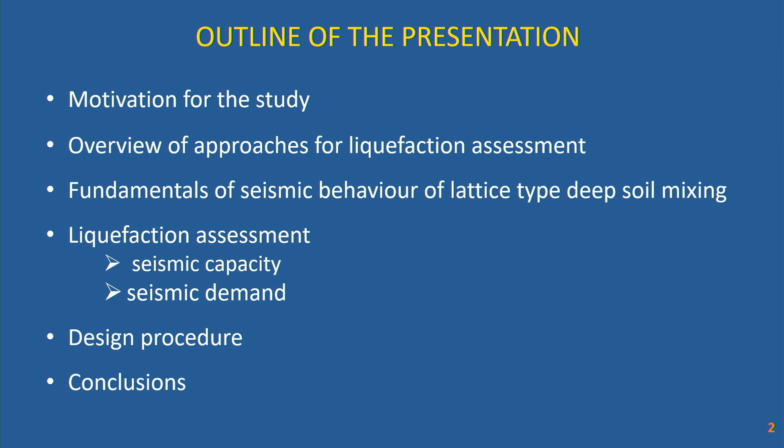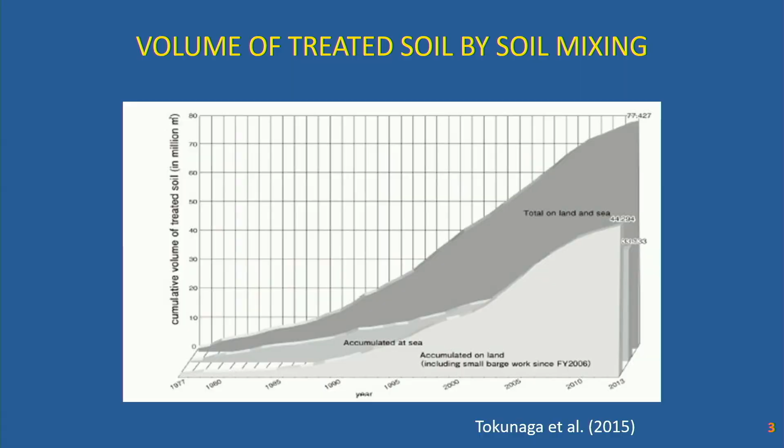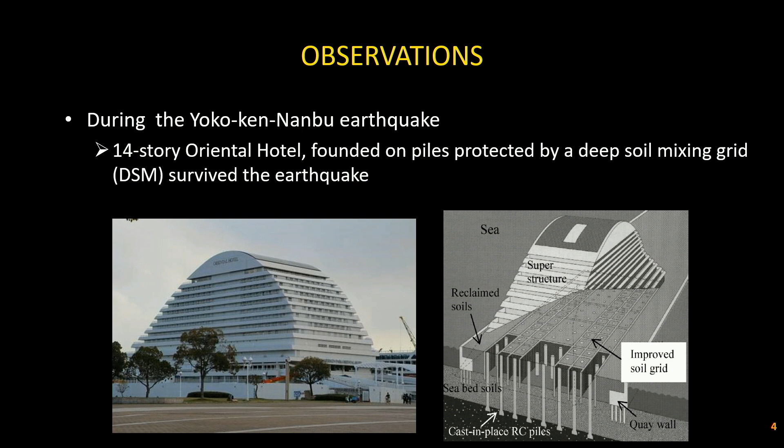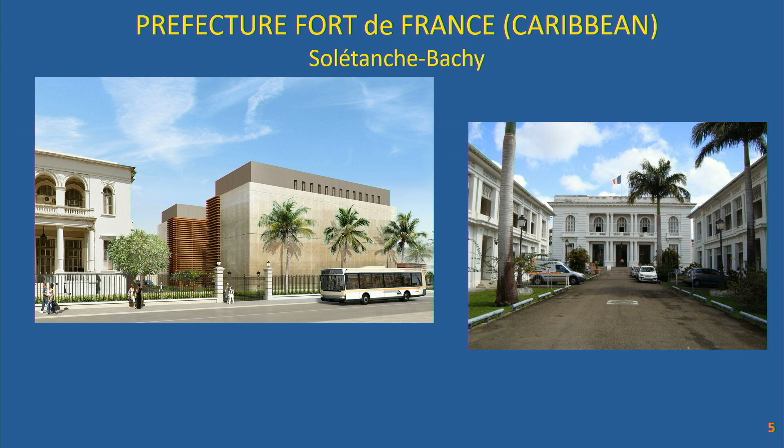The second example, for those of you who were here in 2018, I presented this project already, but at that time we had just completed it. It's a building in the Caribbean, in Fort-de-France, Martinique, and the contractor was Soletanche-Bachy. The problem there was that the building is constructed on a reclaimed hydraulic fill, more than 10 meters thick, on top of a sloping rock surface.

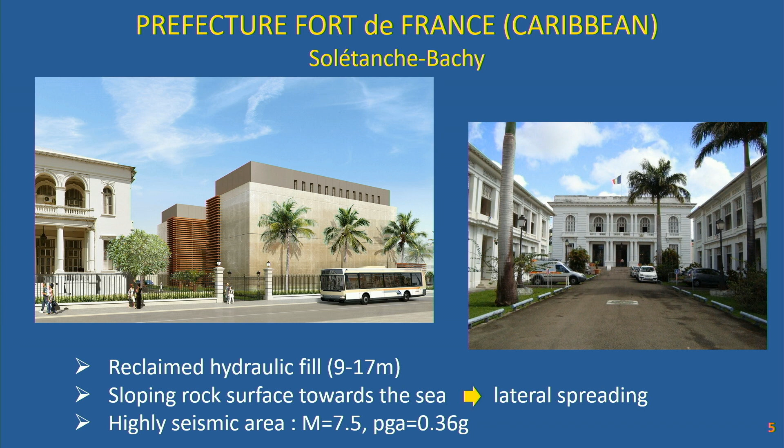Due to the highly seismic area, characterized by magnitude 7.5 and a PGA of 0.36 G, lateral spreading was a real issue. So what was done at that time, inspired by the Kobe Oriental Hotel, was to found the building on this grid of trenches made with deep soil mixing. You can see here, this is the site, and you can see the grid here.

The justification of this foundation was quite easy because we did not care about liquefaction within the cell. The building was designed to rest only on the trenches, and the only issue was to protect against lateral spreading.

So justification was quite easy. But of course, the contractor, Soletanche-Bachy, wanted to go further in the future, and they needed more precise guidelines, even to account for the pore pressure buildup within the cell, trying to have a building with a raft that might be thinner, and so on. That motivated a research project sponsored in France by the National Federation of Public Works and by Soletanche-Bachy. These are the results of this project that I will show now.

So first of all, we have to go back to the fundamentals of liquefaction assessment. When I say we have to go back to the fundamentals, it's because usually people assess liquefaction based on the stresses induced in the ground.

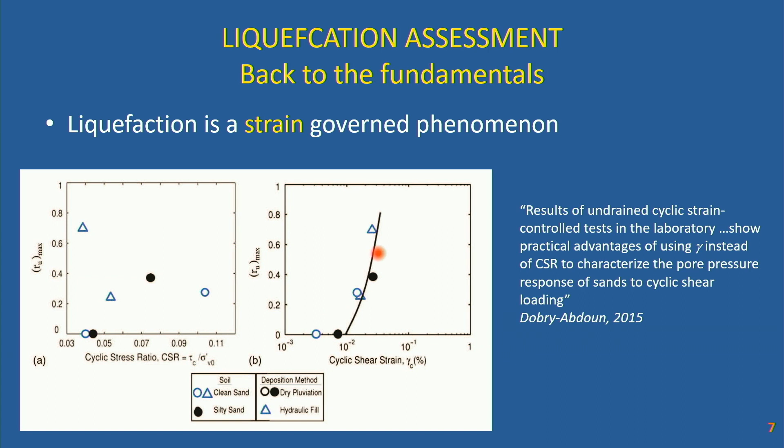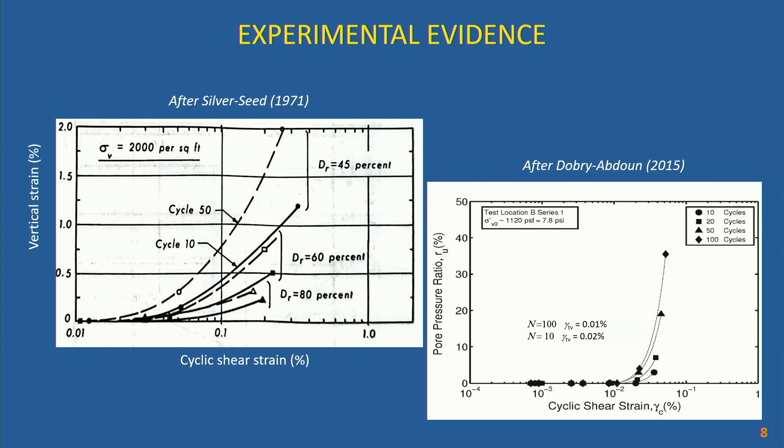And this is again the same plot in terms of pore water pressure taken from Dobry and Abdoun. So, evaluation of soil liquefaction: what we are doing right now, and when I say right now, it will even be the same in the new version of Eurocode 8, which will come out in a few years because it goes to the formal vote next year.

It's a stress-based approach, like the one which is well known now, described in the NCEER report, or the one used by Idriss and Boulanger, which will be recommended in the new version of Eurocode 8. So it's a stress-based approach in which you have to define the seismic demand in terms of cyclic stress ratio, induced stress. You have to compare it to the seismic capacity, the cyclic resistance ratio, which is usually obtained from field tests like SPT, CPT, even VS. And then you calculate a factor of safety, which is a ratio of both quantities.

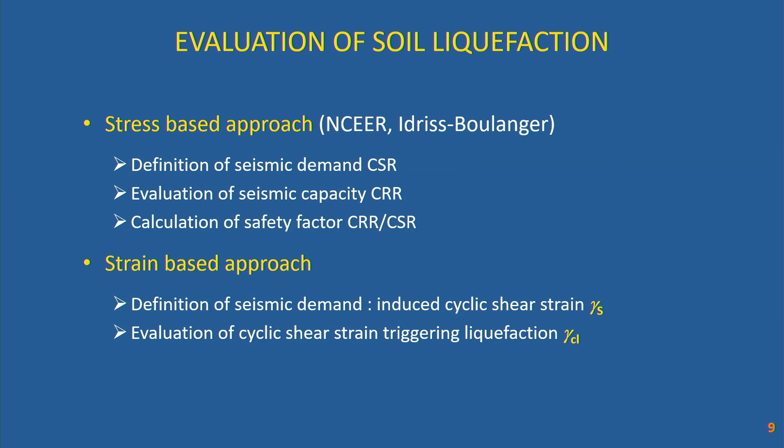What we propose here, we do not propose that. What was suggested by Ricardo Dobry is to use a strain-based approach. In that case, the seismic demand will be expressed not in terms of stresses, but in terms of induced cyclic shear strain. And the seismic capacity will be expressed as the cyclic shear strain that triggers liquefaction, which I call gamma CL. This is the approach we will follow in this presentation, and this is why I say it's a novel approach, because it has not really been used until now.

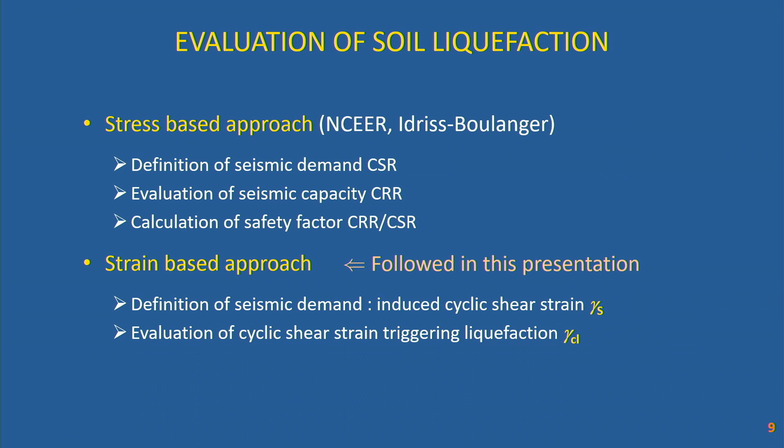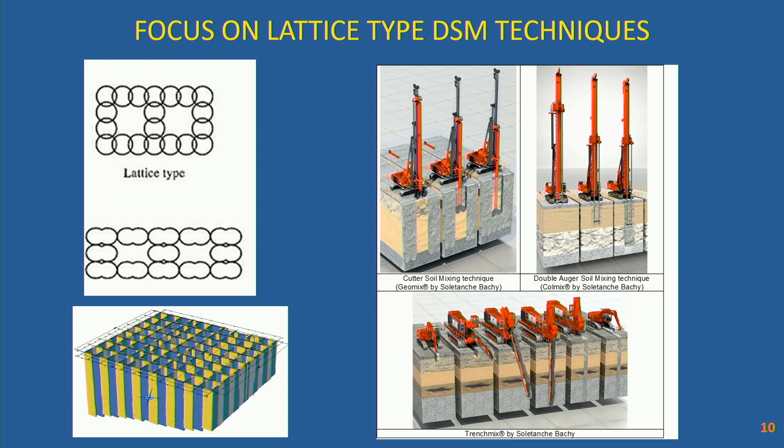So how does it work? At least qualitatively, you can imagine when you have a caisson, it's very stiff, stiffer than the soil, which means that you increase the overall stiffness of your soil profile, which means that you will decrease the induced cyclic shear strain. And from what I said, if you decrease the cyclic shear strain, you will decrease the induced pore water pressure. This is basically the idea behind this DSM grid.

It's not new. Some people have already studied that, and I quoted here two studies, both in 2013. The first one, by Nguyen et al., was published in the ASCE Geotechnical Journal, and it's based on numerical analysis. The second one, by Guéguin et al., was the topic of his PhD thesis at École Nationale des Ponts et Chaussées, and it's based on an analytical approach using the homogenization technique for composite materials.

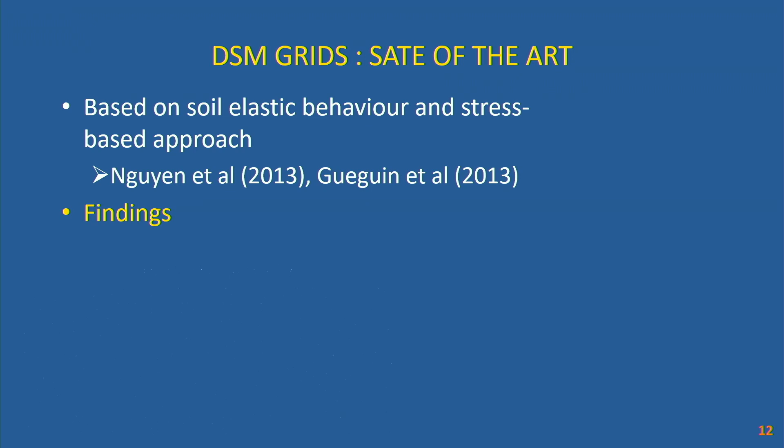What is important to realize is that both studies assume an elastic soil behavior and a stress-based approach. We are still with a stress-based approach. What did they find? They found the same thing, which is quite comforting, which is very important.

First of all, if you look at the shear strain in the improved soil, they both concluded that the shear strain is not homogeneous. You don't have compatibility between the strain in the reinforcement and the strain in the soil. This is very important because many guidelines, if you refer to the work by Baez and Martin, for example, assume homogeneity between the reinforcement, the column, and the soil, which is not the case. And this is very important. The second finding, I took that picture from Guéguin et al.

So this is an analytical solution. What is plotted here on the horizontal axis is the replacement ratio, the amount of improved soil normalized by the total volume of soil. On the vertical axis is the ratio of the homogenized ground divided by the shear modulus of the soil, the stiffness of the virgin soil.

And you have different techniques here: an isolated column, a trench oriented perpendicular to the seismic loading, and a trench oriented in the direction of loading. Of course, both solutions don't make sense in earthquake engineering because the earthquake has two directions, not only one. So in the middle, you have what we call this DSM grid, where we have trenches in both directions.

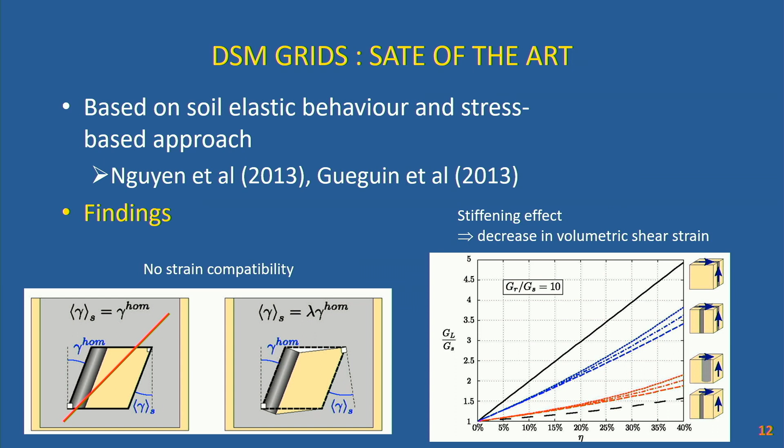So we started from there, and we tried to go a little bit further. First, to use a strain-based approach, and second, to relax this assumption of linear elastic behavior for the soil. So we have these two ingredients: the seismic capacity and the seismic demand.

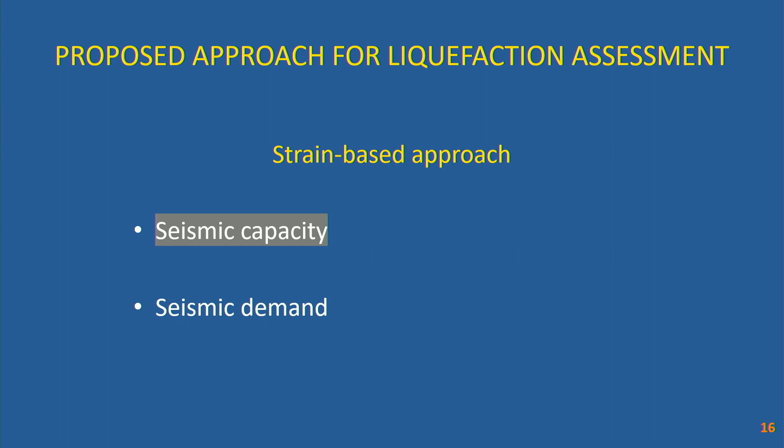Second point is the seismic demand. The seismic demand was evaluated from both experiments in a centrifuge facility. These tests were run in what we now call Gustave Eiffel, as Yanis mentioned. It was formerly IFFSTAR, and even before that, LCPC.

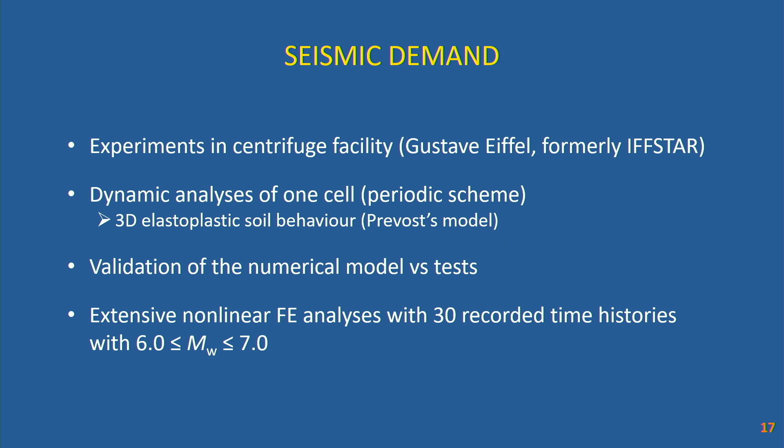So we ran a few centrifuge tests, then calibrated our numerical model against this centrifuge test, using this time a 3D elastoplastic soil behavior - we used the Prevost model. We validated our numerical model versus the test, and then ran extensive nonlinear dynamic finite element analyses with recorded time histories, with magnitudes spanning the range 6 to 7.

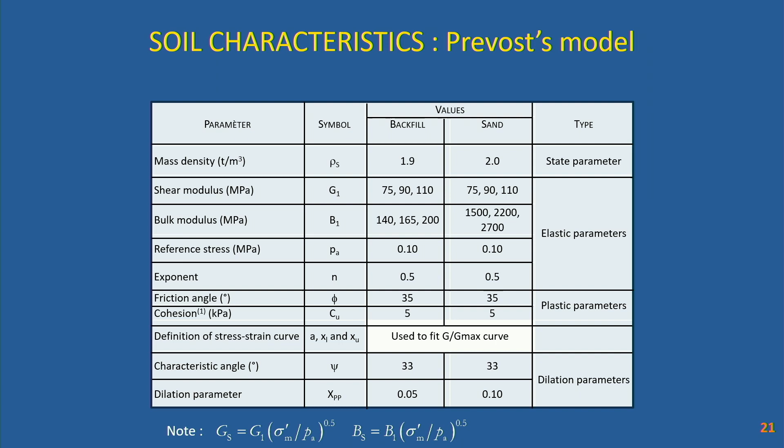What are the parameters involved in this analysis? You have parameters related to the sand itself - the shear modulus, mass density, height of the soil column. When I mean height of the soil column, this is the height from the ground surface down to the base of the model.

What will be important is the maximum free field cyclic shear strain, the one you get without soil reinforcement. The trenches are characterized by their shear modulus, mass density, height of treatment - which is different from the height of the soil column - and also the trench thickness, the spacing between trenches B, and of course the average shear strain induced within the cell, which would be a result of the calculation.

Then the ground motion is characterized by its magnitude and PGA. For PGA, I use the ground surface acceleration, which is a result of the calculation because we impose the motion at the base. We scale the motion at the base between 0.05g up to 0.45g. So you see we have 11 parameters here.

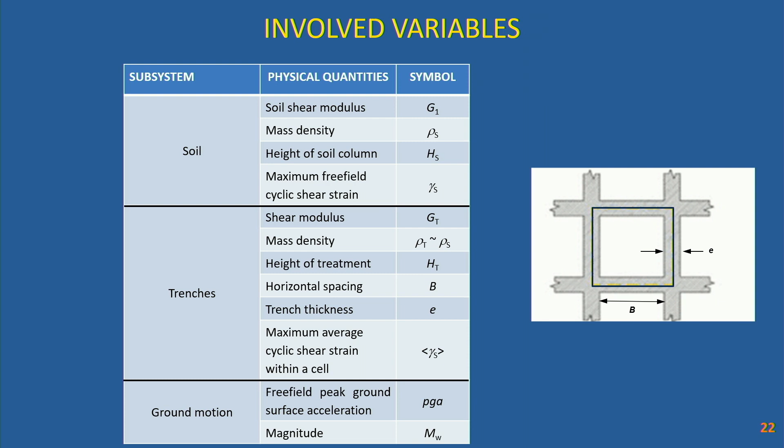Hopefully, we made some dimensional analysis, and we know the Vaschy-Buckingham theorem. In France, we call it Vaschy; in the UK, they call it Buckingham.

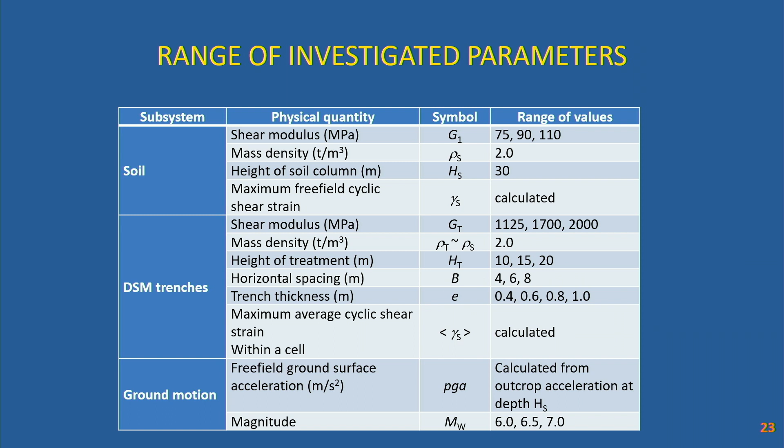So we have 11 parameters, 3 fundamental quantities. Here I'm showing the way we modify the different quantities - we parameterize the shear modulus of the soil, the shear modulus of the trenches, the height of the treatment, the spacing between trenches, the thickness of the trenches, and the earthquake.

So we had 11 parameters and 3 fundamental quantities, which means we have 8 independent dimensionless quantities, listed here. Some are obvious, like the ratio between the trenches and the soil, the replacement ratio, the aspect ratio, which is the width of one column divided by its height, and so on.

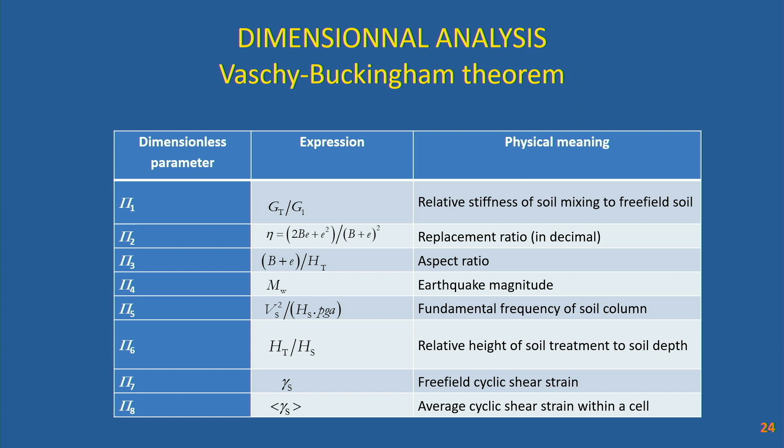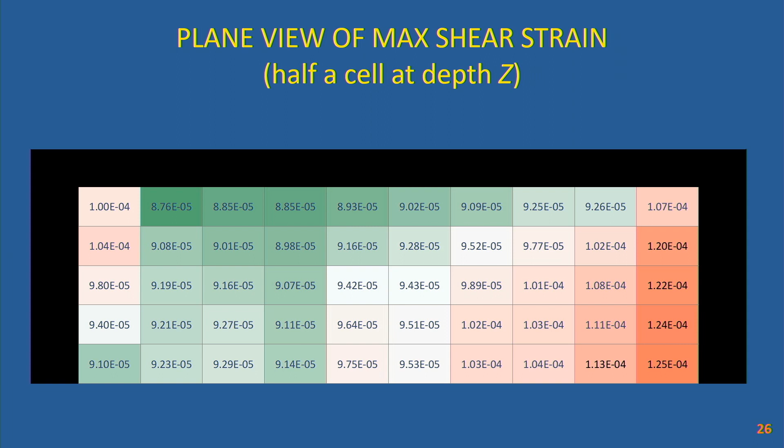So what we did, we tried to relate the free field shear strain that we assume we can get from another approach, site response analysis or anything else, and we tried to relate that cyclic shear strain in the free field to the average cyclic shear strain within the cell. So what you see here are all our dimensionless parameters.

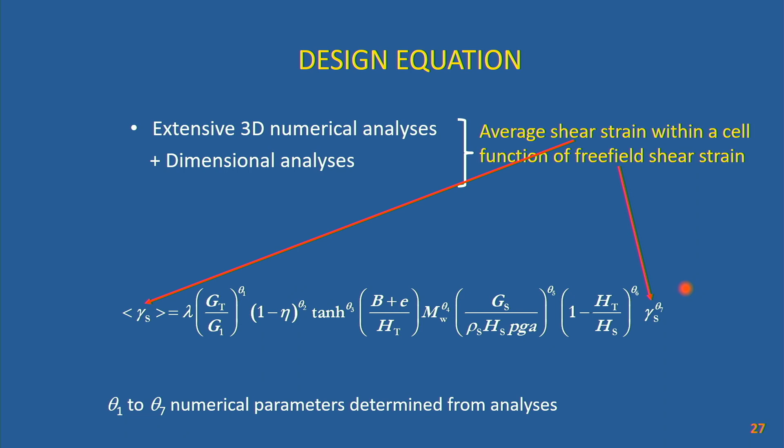You see the modulus ratio, the replacement ratio, and so on and so forth. And we fitted that to an equation where you have parameters theta 1 to theta 7, which were fitted to the results. Just to show you, here is a plot where the calculated average shear strain coming directly from the numerical analysis is compared to the predicted one from the previous equation.

You see, okay, this is close to the bottom of the column, and this is in the middle or top of the column. So you see that we have quite a good agreement, and we are quite satisfied, and we are able to use it.

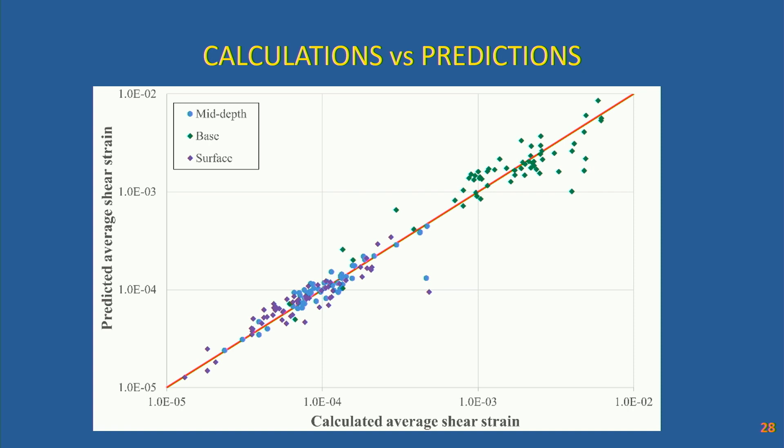And go to this design flowchart, where you have the input data: the seismic data, magnitude, that will give you the liquefaction, the shear strain triggering liquefaction. Then you have the DSM data, the spacing, height, modulus, and so on. You have the geotechnical data, the soil characteristics. And of course you need the free field shear strain, so the free field site response.

You can get it from a site response analysis or with more simplified approaches using, for example, the NCEER approach. So with all these input data, we can calculate the average induced shear strain within the cell, which is a function of my dimensionless parameters, and compare it to the shear strain triggering liquefaction that we get from the seismic capacity we derived.

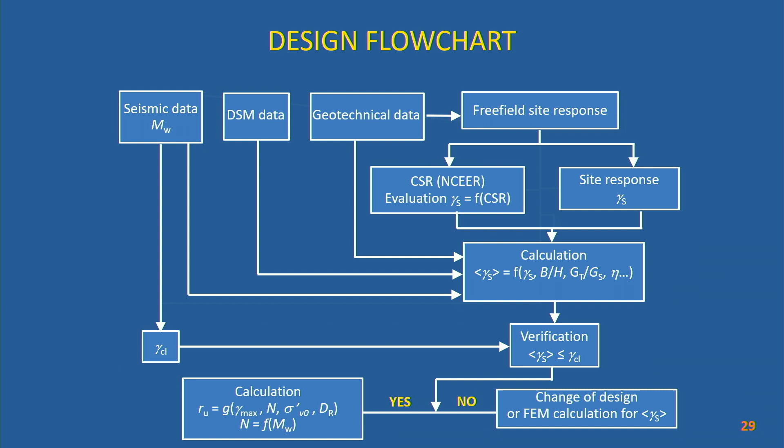Then we compare: if it's less than gamma CL, everybody is happy. If you are happy, you can compute the induced pore water pressure using any kind of pore water pressure model. If not, of course, you have to redo your design or use more refined analysis. So this is the design flowchart that Soletanche Bachy is now using for preliminary design.

So just to conclude, DSM grids offer promising perspectives because they are less expensive than any other kind of soil improvement. They are quite quick to implement. From the environmental point of view, it's better than jet grouting, for example. And also it might be cost efficient, because if you can found your building with a shallow foundation, it's less expensive than with a pile foundation.

So based on extensive numerical 3D analysis, which we have validated by comparison with centrifuge tests, we defined this design procedure. What is novel here is the fact that it's a strain-based approach, which I consider more fundamental than the stress-based approach. Of course, you cannot evaluate your safety with a factor of safety. What you have to calculate is the induced pore water pressure and see if it's acceptable or not in terms of post-earthquake settlement.

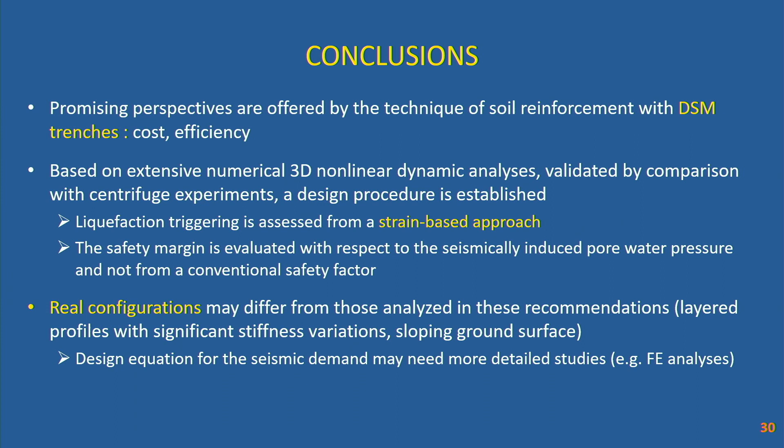Just a warning, because I saw some people trying to use this design flowchart for situations for which it was not developed. For example, in sloping ground, like we had in Monaco for a recent project, these results should not be used. But it does not mean that the philosophy of the guidelines cannot be used. You simply have to calculate your induced cyclic shear strain differently, and then you can compare it with your seismic capacity. So with that, I will conclude, and thank you for your attention.

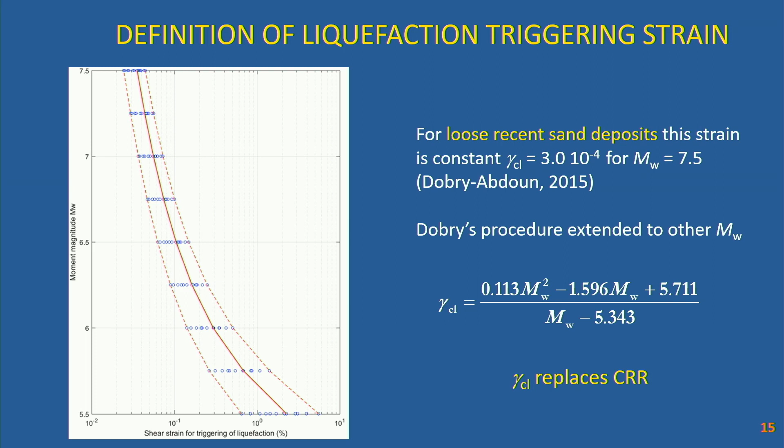Okay, but thank you. Be careful, this is valid only for, as I mentioned, loose recent sand deposit or uncompacted fill. If you go back to... I don't know where is Rick. No, okay, sorry. Here, for example, we are in that region. We are not talking about this, okay? Here, the cyclic shear strain triggering liquefaction is a little bit higher.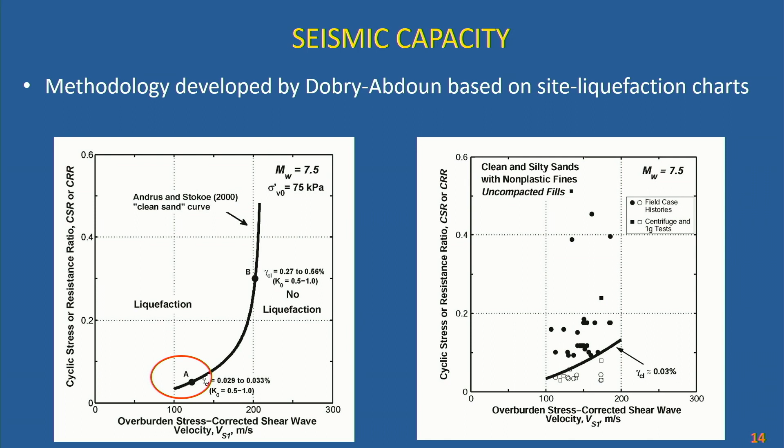You showed in slide 25, and also in the slide you showed previously, 25, that... yeah, here, okay, okay, 25, yeah. No, oh no, I'm going the wrong way.

So here we have some big values at the bottom. My question is, you have this limit of 0.03, right? So you would base your design on avoiding exceeding this limit exactly at the bottom, which you have this peak, and below, below the caisson. This is something you have to pay attention to, because you will make your grid stop in a non-liquefiable layer.

It will be non-liquefiable in the free field, but once you put the caisson, it might become liquefiable because you will increase the shear strain. Physically, you can understand because you have a big rigid mass and the layer just below just acts like an isolation system, and you will concentrate the strain in that layer.

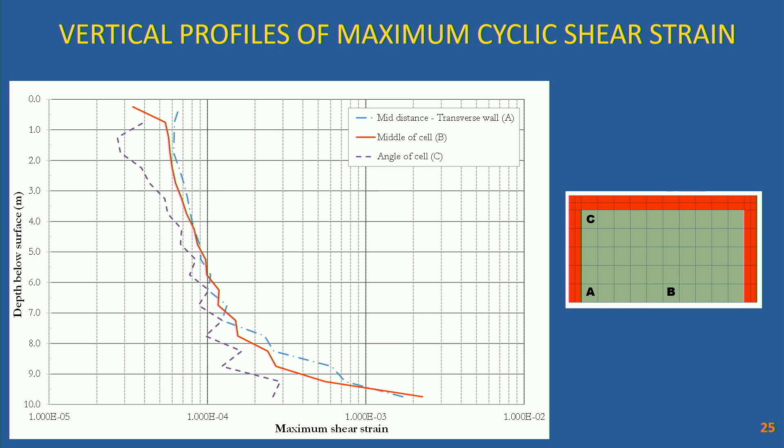Yeah, but this would be exactly my question. Is this bad? Yes, it's bad. You have to pay attention to that, which means you have to check afterwards with strains which are different from your free field, that the layer is not liquefiable. I mean, you have this caisson which is not liquefied, and underneath maybe you have a layer that liquefies. But in that case, you may either deepen your caisson or do something. My message here is: pay attention to the layer just below. This is important.

One question there. It's just in line with your question, because if we go down further, we increase the mass. So we may end up in the same situation, because we have to go down to the rock bed.

No, because soil is not really homogeneous, you may find a layer which is much denser. For example, we implemented that in France in two projects and also in Monaco, where we found a layer which is a little bit denser, and we checked that it was non-liquefiable below. If you have rock, it's even better, of course. For example, in Fort-de-France, the caisson went down to the rock.

But if I may continue on that issue, how thick would the layer be where it is possible to liquefy below the caisson? If it's maybe thin, then it's not so important, but if it gets thicker, it could matter. Do you have results from your numerical assessment? You don't show what happened below.

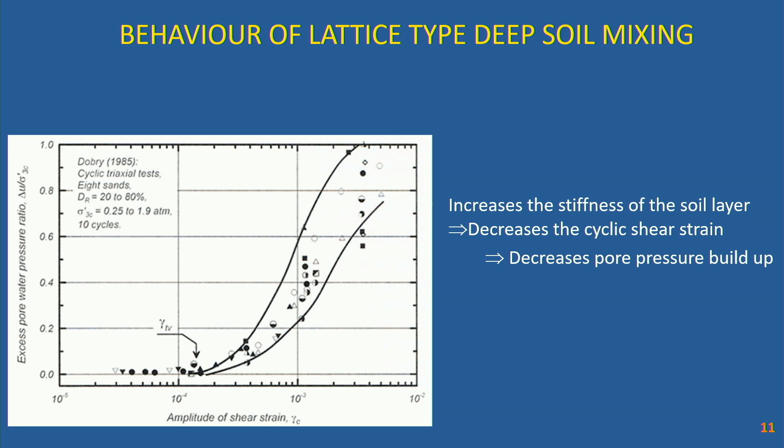So is it for any type of soil? No, for loose sand deposit, recent deposit and so on. Okay, but for any type of sand? For liquefiable ones. Those who are present -- liquefiable, but there are many types of sand. I would say the sand which are present in the database.

Do we have other questions? Okay, if not...